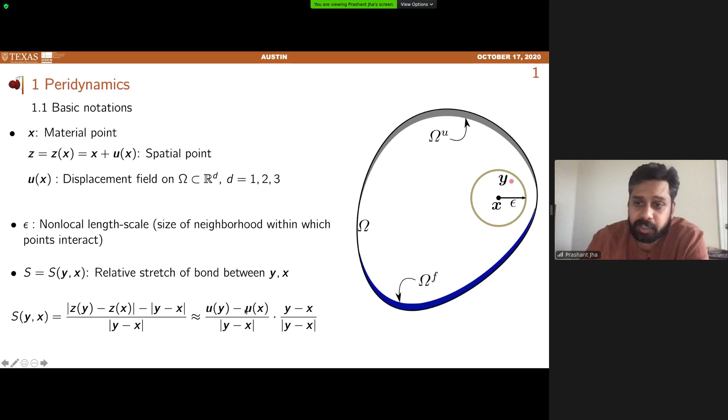If you assume that u is small compared to the size of the domain, you can linearize that relation, and you get what is in the last part of the last equation, basically in terms of displacement difference. The internal force, as we all know, is basically a sum of pairwise forces, F epsilon, and you are given some kind of constitutive law which relates this pairwise force with bond strain. It is a function of strain, and could also be a function of the two material points, y and x. A very simple example is a linear spring model.

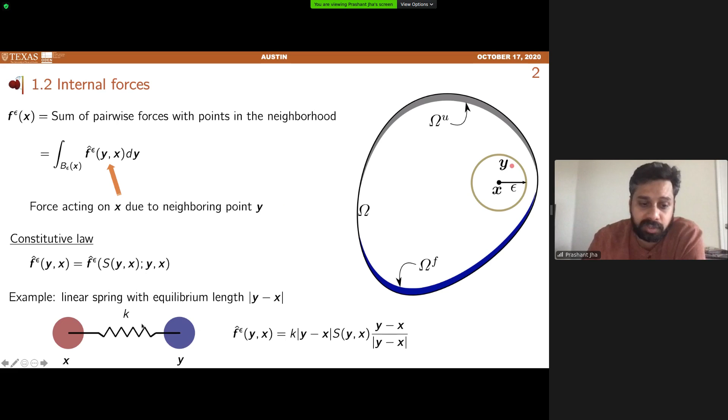So you can imagine a linear spring with constant k between y and x, and you can write down the pairwise force because of that spring with k stiffness, which is here. And this is basically a linear elastic peridynamic model. Basically the slope defines the linear strength of a material, and it does not break. It cannot break. It's just linear all the way through all range of strains.

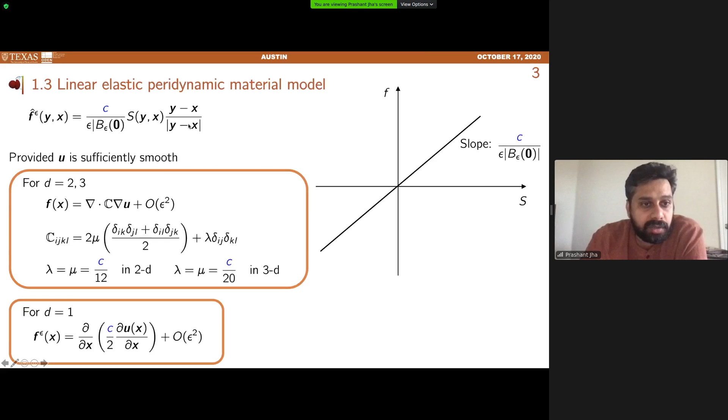When U is smooth, again we all know that, it basically is a good approximation of divergence of classical stress or Cauchy stress, where you have the elasticity tensor, which is basically dictated by your constant in the peridynamic model C. And you add the fracture. Basically you say that, okay, if my bonds are stretched beyond SC, I'll break the bond. I'll have zero force, and that's the way you add fracture to the model. And fracture basically is a collection of broken bonds.

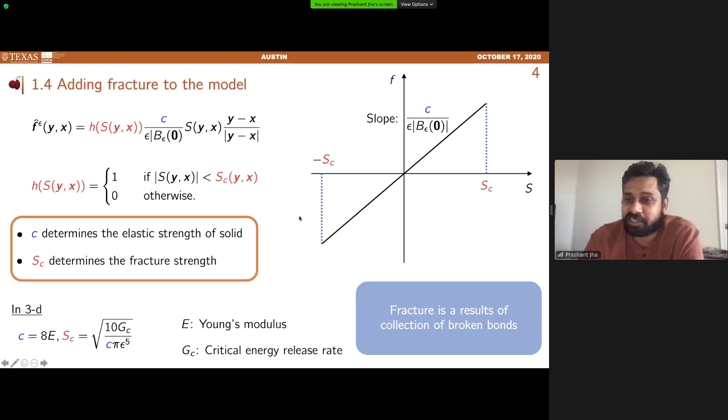And a very important remark that we all know already. Again, I think most of it we all know, but I'll repeat it anyway. So C, the slope of this profile, dictates the elastic strength of a solid, whereas SC, critical stretch, determines the fracture strength of a medium. And instead of considering this kind of fracture model on the left, what we do is regularize it with this smooth potential function, and we have this softening model. And some of the results that I showed in the first part of my talk are mostly obtained using this softening model.

One of the benefits of this softening model, as you saw also from Rob's talk, is that you can do a lot of theoretical study with this kind of model. It has really nice features. You can show well-posedness in Hoelder space, in Sobolev space, and that enables you to very rigorously do a priori error estimates on piecewise constant approximation or finite element approximation. So that's really nice.

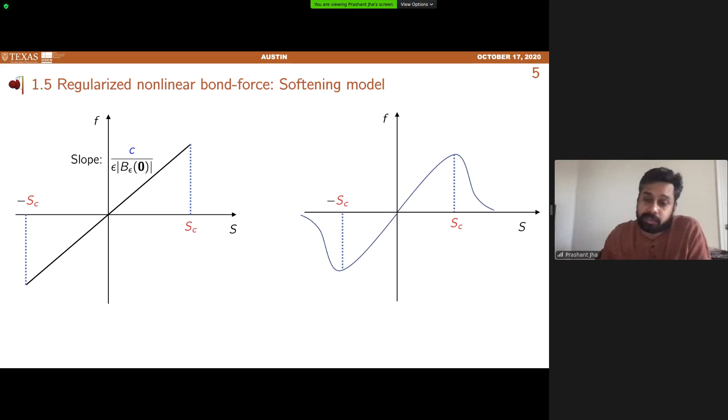Okay, so this is a full set of equations. You have balance of linear momentum first, and then you have balance of angular momentum ensured by this pairwise form of the pairwise force. This is a typo: instead of by, it's a bold y. It's a LaTeX typo. But balance of angular momentum is really ensured by having this kind of relation there.

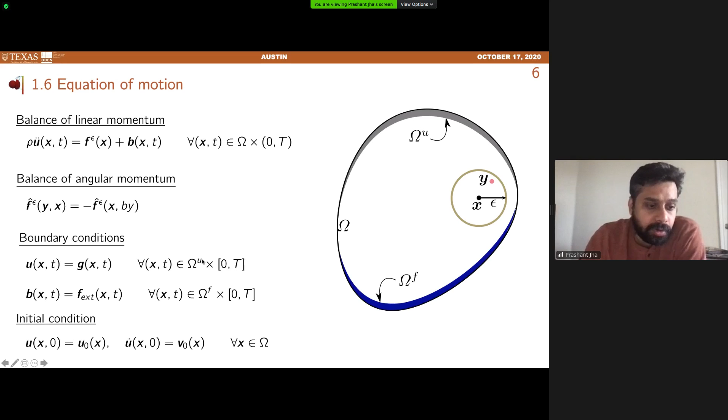And you are given a boundary condition, or you prescribe a displacement on a non-zero area in 2D or non-zero volume of the domain in 3D. And then you're also supplied some kind of external force, either near the boundary or in the body itself, in the bulk. And you are also given initial conditions in displacement and velocity.

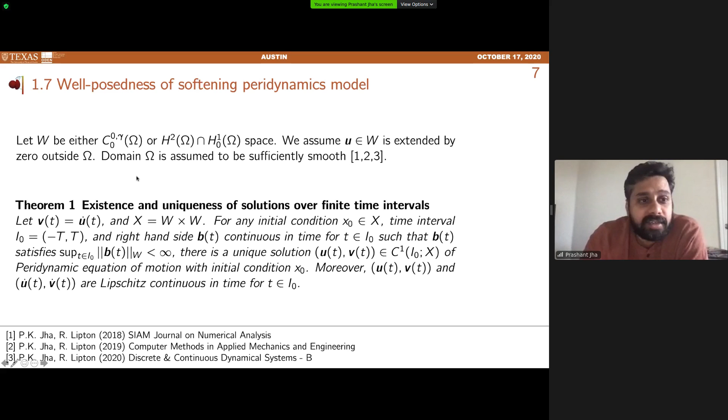So people are still trying to develop a coupled method where you can remove some of the ad hocness, and some of the problems that arise because of non-local and local coupling, like material properties being completely different. How the material behaves in the local model compared to the non-local model is different, and because of that you can introduce spurious effects in the displacement. People are trying hard to alleviate that, but it's still an open problem, I'll say. So this is one of the areas where we have opportunity.

It's difficult because, like people have already mentioned, peridynamics has wave dispersion, which is not present in the local model. So when you have a domain where in one part you have a local model and in another part you have a non-local model, you can see that there's a problem because of dispersion already. Basically the material could be incompatible at the interface, and this could introduce either spurious effects, or it could also cause a discontinuity in fields.

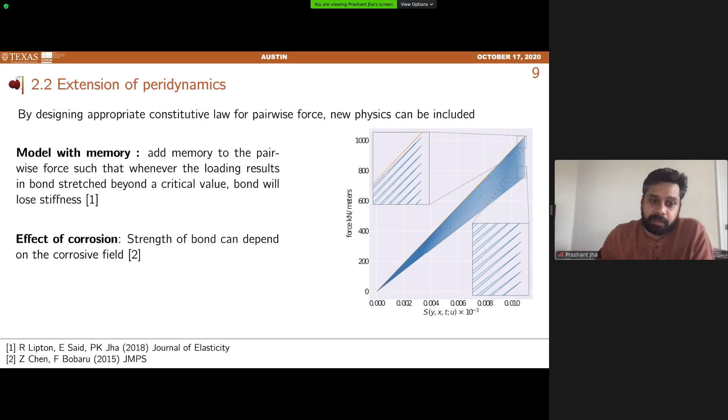Okay, so this is the third part of the first part of my talk. So basically application of peridynamics to fracture in solids. So first point is localization of damage. I'll first go by defining what is process zone. Process zone is basically, in a simple definition, I'm not being strictly rigorous here, a region of points where you have one or more broken bonds. And in this region, strains are typically high compared to the region where displacements are small.

The width of the process zone, at least for the bond-based model that we have experimented on, is about 2 epsilon plus minus some mesh size. And this width goes to 0 as epsilon goes to 0. So the process zone shrinks to a curve or surface. And as epsilon goes to 0, strain basically blows up. So you have higher and higher strain, and ultimately, if epsilon is really 0, it will be infinity, indicating that there you have a discontinuity in the displacement.

So in some ways, for fixed non-zero epsilon, peridynamics is a regularization of fracture in which the discontinuity in the displacement in the LEFM model along a curve or surface is replaced with a process zone, where you have a bounded strain. Although the value of strain is much higher, it's bounded and it's limited to a very small region.

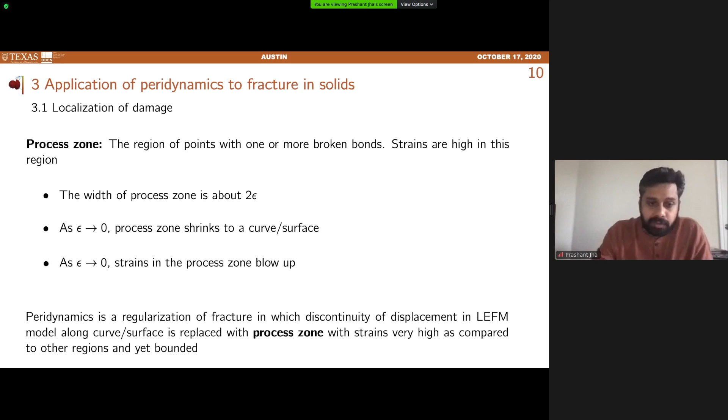Okay, so now I'll show that this is what is happening numerically also. This is a very simple setup. We have a mode 1 crack, the horizontal crack shown in red at the middle point of a vertical edge in the figure. And on top and bottom, we are applying a body force on a very small area. The depth of this region where we're applying body force is equal to epsilon, the horizon. And the body force has this form: it's basically some fixed number divided by epsilon.

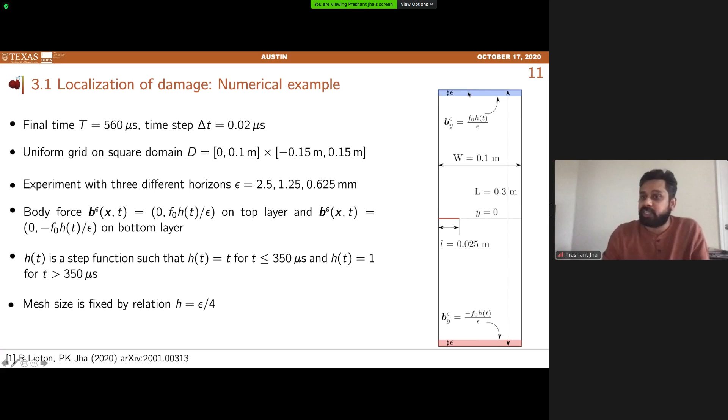So every time you change the epsilon, the body force will scale accordingly. And since you change the epsilon, the region where you are applying body force also shrinks. So if you compute the net force applied on top and bottom, you'll see that it is independent of epsilon. And why we want to do that is because we want to compare results for 3 different epsilons, and it's only fair to compare them if the external conditions are the same in some sense. It's not the same pointwise, but in every other sense it is the same with this kind of body force.

Okay. So this is a result where we basically look at two times process zone in red. And you see that in A you have a bigger epsilon, in B you have intermediate epsilon, and in C you have smallest epsilon horizon. And you see that thickness of process zone is shrinking.

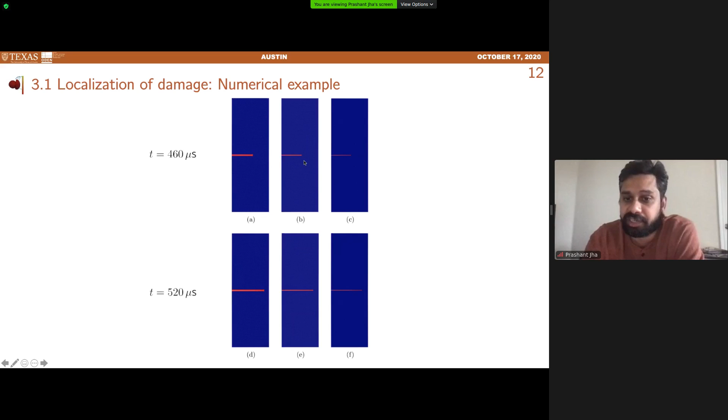And here we plot the figure on top of each other, and then we basically look at process zone for three different epsilon, and it's very amazing this result that process zone for smallest epsilon shown in light yellow is basically encapsulated by a process zone for intermediate epsilon shown by dark yellow, and that is again encapsulated by process zone for biggest epsilon we have in the simulation. And this is really nice.

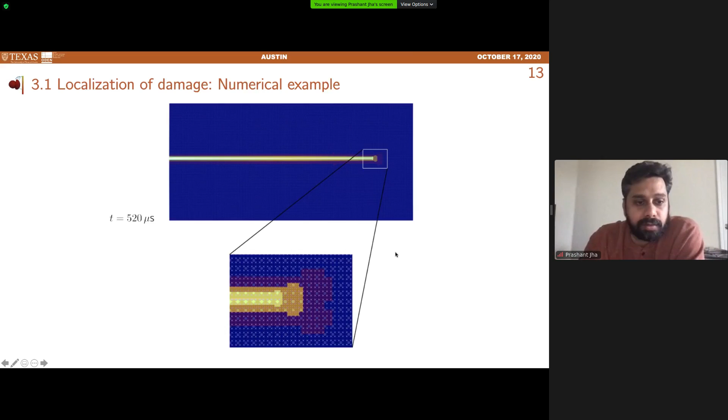So you can really see that process zone of smaller epsilon is a subset of a process zone corresponding to bigger epsilon. Okay, so that shows the localization of crack. Now I want to focus on this crack propagation and how this peridynamic model can capture the boundary effect. Again, I think this previous result and this result is already demonstrated to you by Rob, but I'll just flash you those results again.

So you have a plot of crack velocity divided by Rayleigh speed, and then you see that it is stabilizing at 0.6 value, which is also observed with this kind of same material parameter experimentally by J. Fineberg. So I think that is also nice that we can observe numerically what is observed experimentally by different people.

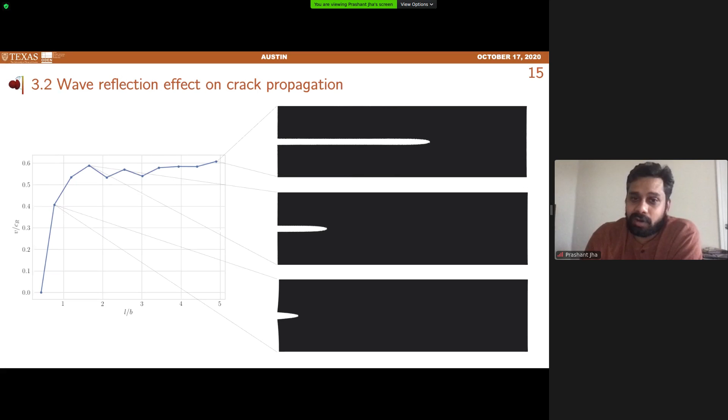Okay, so I wanted to make this talk very quick, basically. So I just have those many slides for first part of my talk, and then I quickly want to move on to second part of my talk, which is peri-DEM. It's basically peridynamics plus a DEM hybrid method.

So motivation and objective. So DEM-based methods introduce restrictions like it can only do spherical or circular shaped particles. It assumes that particles have rigid body motion. And there are applications where particle attrition under extreme loading conditions or particle damage, a change in shape due to deformation and particle breakage can play a big role. So we are catering to those kind of applications where you require a high fidelity model where the damage of particle can play a big role.

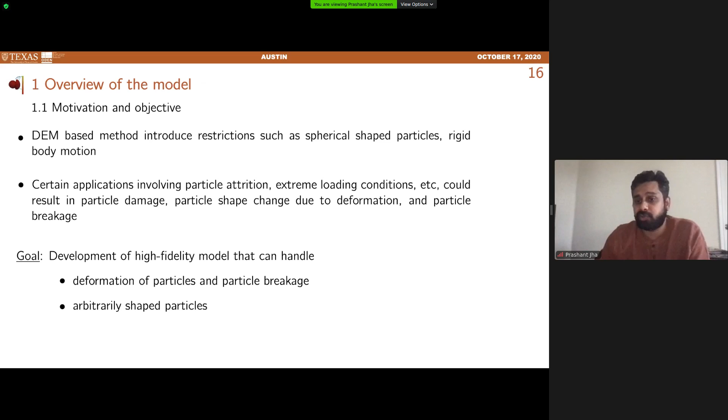So goal is really to develop this high fidelity model and use peridynamics for the intra-particle deformation, whereas use modified DEM-like law for interparticle interaction. So this work is really motivated by 2018 work by group at UT Austin, basically by Foster et al. And they introduced this idea that you use peridynamics for intraparticle interaction, whereas you use some kind of normal contact law

between two particles, which is also in a way non-local, but the length where the particle near the boundary can see the nodes of the opposite particle is about mesh size. So it's a non-local idea, but typically the critical radius, you'll see that we keep it as 0.95 of mesh size. So yeah, I'll not go more into that.

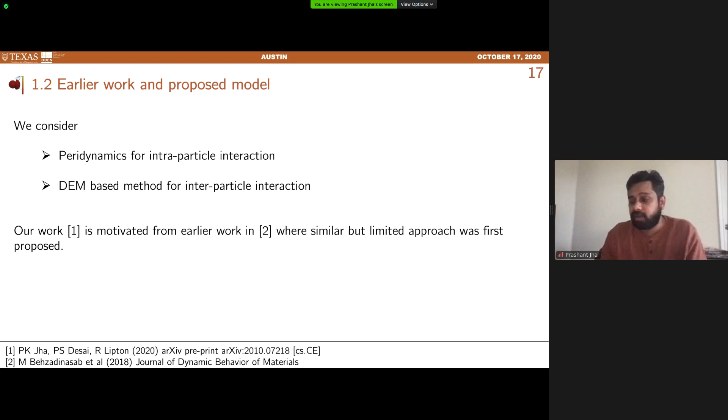So I think it's a non-local idea, similar to what you have for internal forces in a media, like you do non-local calculation, a similar non-local contact law for two different particles can be introduced. But really this idea was introduced by these people, and then we got motivated by those models, and what we thought is we can do more, we can be more specific in this interparticle contact. We can learn from DEM based methods and bring in many of the features that we see in DEM based methods.

Okay, so the key idea is this. You apply contact forces between discretized nodes of particles, as Devdeep also presented to you. So you may look at these two particles in figure A, and you zoom in the region where you think they may have a contact. So two nodes of two opposite particles, Z and Z prime.

You imagine that these are connected by some generalized spring-dashpot system, where we are also showing a resistor, which basically signifies the friction force that we have in the model. So it is connected by a linear spring with modulus Kn, then it has damping viscosity beta n, and then it has resistance, which we see as a friction coefficient.

And this system is only activated when Z and Z prime are very close to each other. So it is not there if the two nodes of two different particles are far from each other. So this is how it's done in the DEM-based model, as you see in the reference there.

So we thought we'd just apply the DEM-based model, where typically in DEM, Z and Z prime are a particle, really not a discretized node. And you can do the same with this discretized node. You can treat them as a particle as they do in DEM, and then apply a similar contact law here.

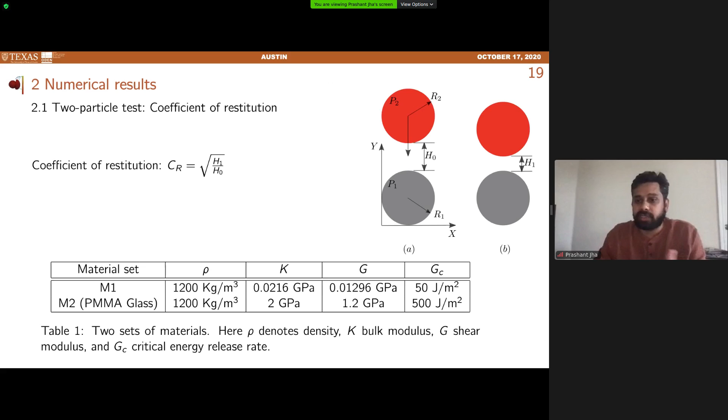So in that sense, this epsilon n could be used to calibrate this parameter by looking at the data and finding the CoR for two particles of different material properties, and then using that to find epsilon n. So that gives you the way to calibrate the damping part of our model.

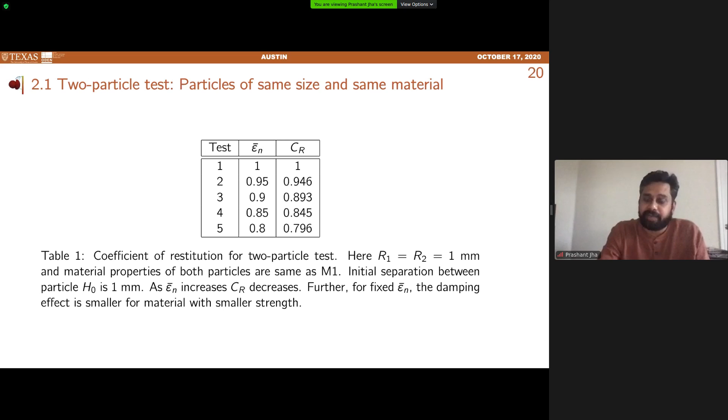And the Kn part, the spring part of the model, as Devdeep also presented to you, that expression is typically related to the bulk modulus, the bulk strength of the two particles in contact. So Kn is already determined by the strength of these two particles in contact. So you only need to use CoR to calibrate beta n.

And then you calibrate the friction coefficient using the angle of repose test. So you let, say, hundreds or thousands of particles just settle down, and they will make certain angles, and this angle is used to calibrate the friction coefficient.

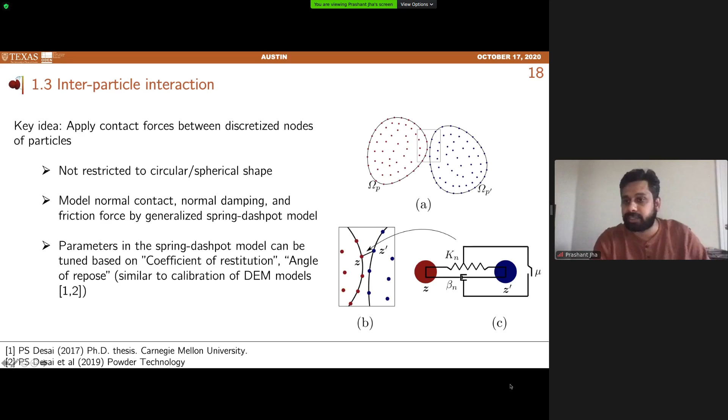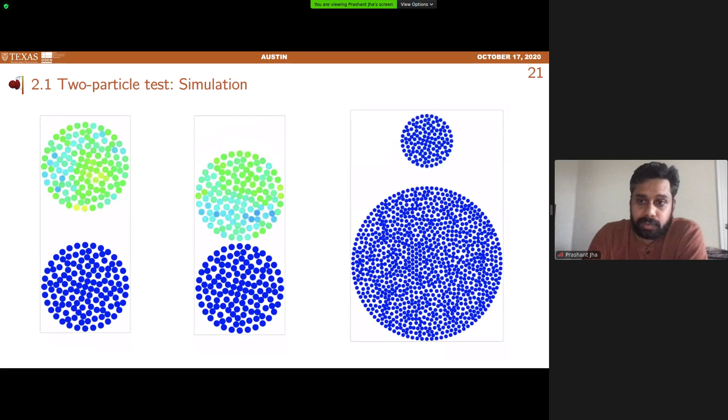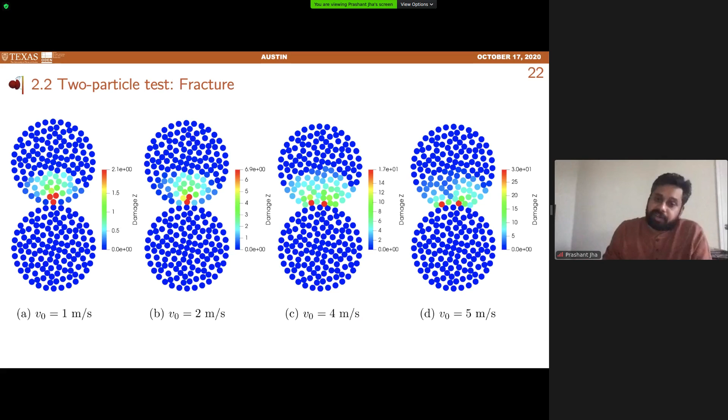Okay, so that's done. So next, what we could do is assign initial velocity to this top particle that is colliding with the bottom particle. And with increasing initial velocity, you can imagine that when the velocity is too high, you would expect that the particle which is colliding with the bottom particle will break. The bottom particle will be unaffected because you freeze all of the displacement of that particle, so you will not see any damage. So you would only expect that the top particle breaks because of this high velocity impact.

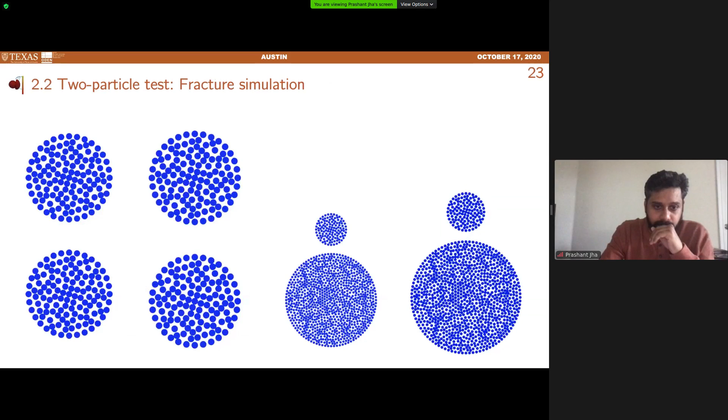So okay, and then we thought we should do some kind of study of mesh effects. It's still early, but basically what we did was we refined the particle further and further, and computed the C of R with this two particle test, and we saw that since the contact radius is fixed by 0.95 of mesh size, every time you have a refined mesh for the particle, you basically reduce the contact radius.

I think the possible explanation for why you see less dissipation of energy with a fine mesh, because C of R is increasing as you refine the mesh, is because the contact radius is small. Therefore, the duration for which these two particles are in contact in this dynamic simulation is smaller, and therefore it results in less energy dissipation for a finer mesh. But this is a very early explanation. We plan to look at these mesh effects more rigorously in coming time.

So let me check the time. So I'll finish in 2 minutes.

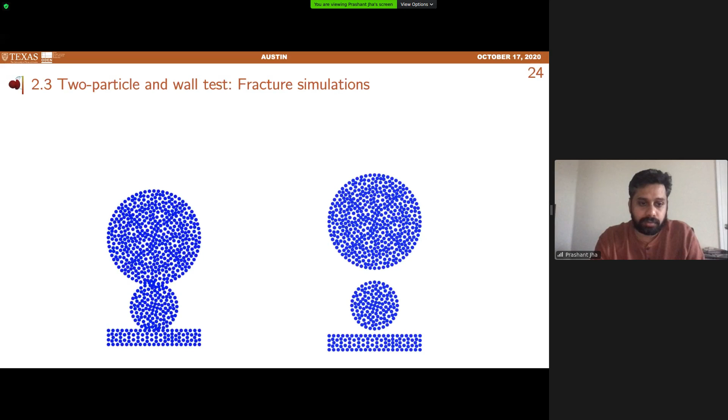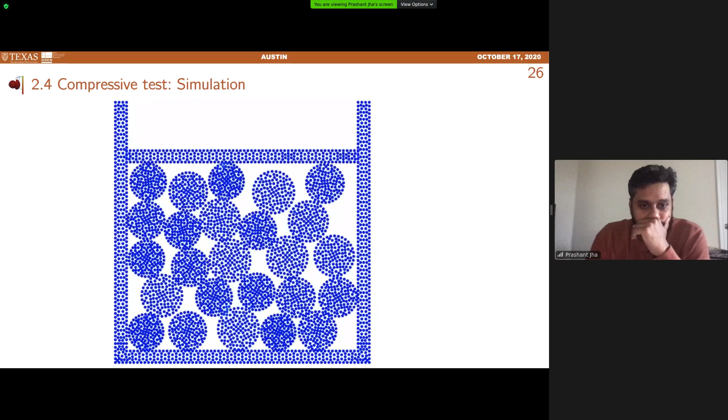Right. So here, what I really wanted to do with this simulation is compute the reaction force felt by this top wall while it is moving downwards. If one would have many more particles in there instead of just 25, what one would see is basically the reaction force will go up because particles are intact, they are resisting very well this wall that is moving down. But ultimately damage will initiate, and damage will percolate to many other particles, resulting in yielding of the media.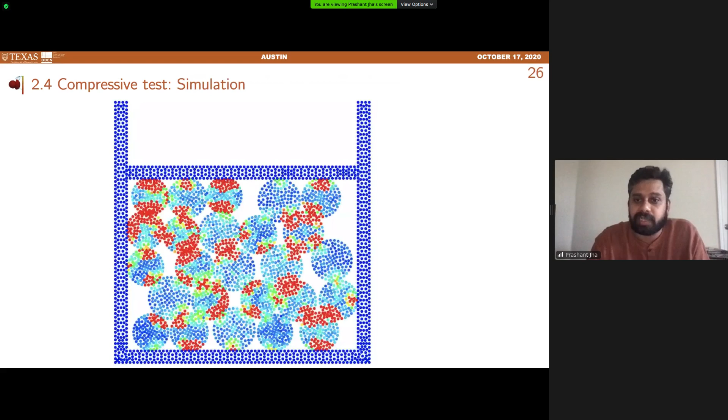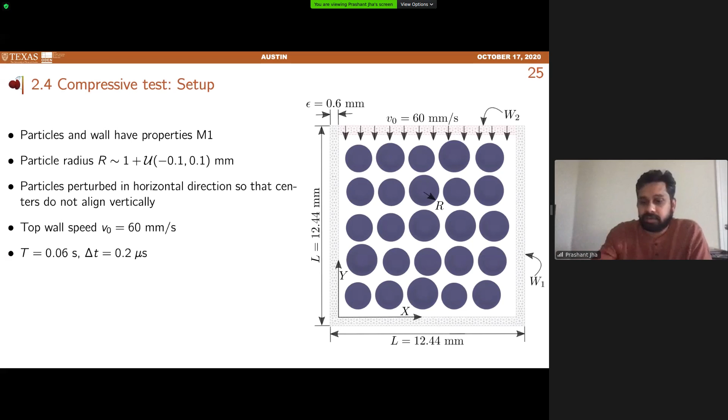So we are working on development of novel methods that reduce the computational cost. You are doing non-local pairwise forces for each particle, and then you're also doing this non-local contact force in a way, because for individual nodes of a particle, you are searching for other nodes in the opposite particle to see if they are within the contact radius or not. So that's a non-local search basically. So all of these make this whole high fidelity model very costly. So we are working on some novel methods that will reduce that.

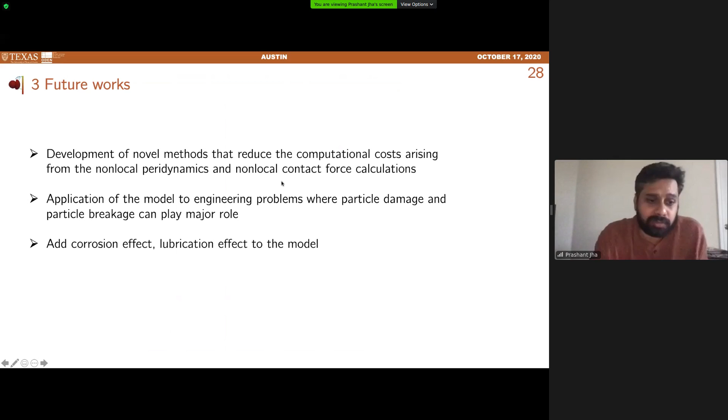Then we are working on application of the model to engineering problems, and also thinking of including some kind of corrosive effect and lubrication effect in the model.